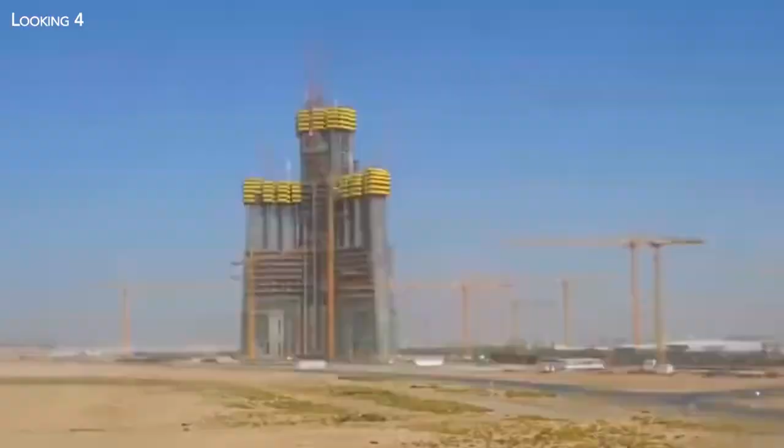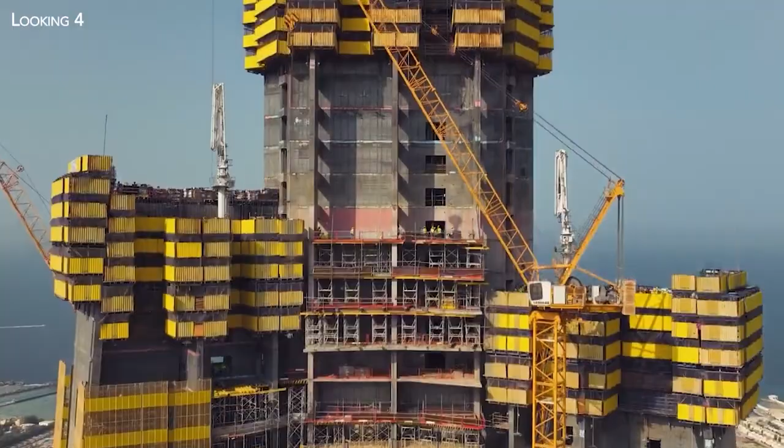For years, this tower was considered dead. An abandoned megaproject, hundreds of millions of dollars frozen in the desert. And yet, against all expectations, something happened. The Jeddah Tower, or the Kingdom Tower, it is designed to be the first building that is 1 kilometre.

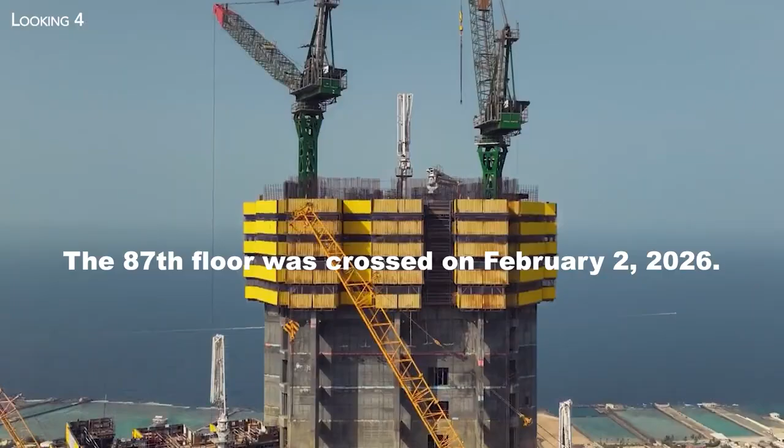In late December 2025, the Jeddah Tower quietly crossed a critical threshold, 80 floors completed. But what really shocked the construction world wasn't the number of floors, it was the pace. Today, a new floor rises every 3 days. If this pace holds, it could hit 1 kilometre by 2028, becoming the tallest structure ever built by humans.

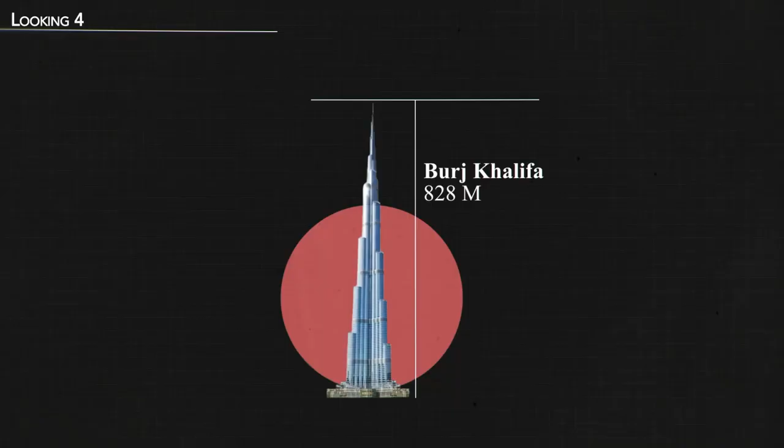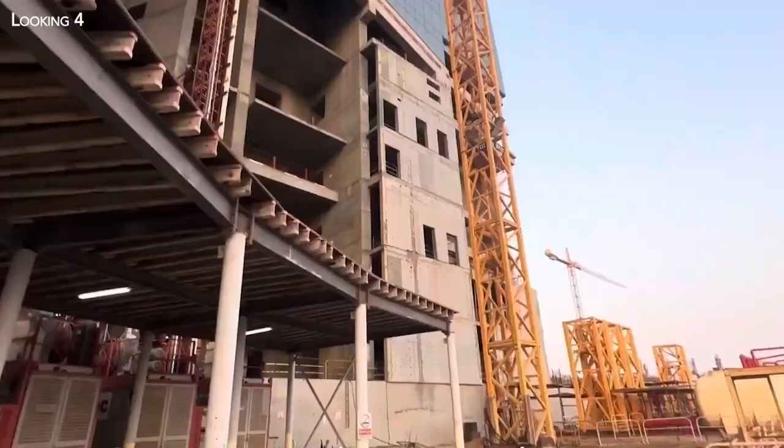So the real question is simple. Is this the greatest construction comeback ever, or the setup for another collapse? Today, we're going to break down exactly how this project came back from the brink of collapse, what engineering challenges have already been solved, and what could still derail one of the most ambitious construction projects in history. Because after a 7-year shutdown, restarting a megastructure of this scale is something that has never been done before.

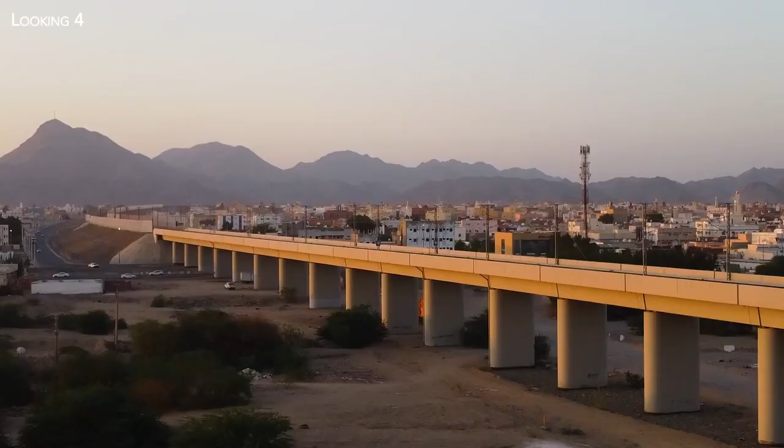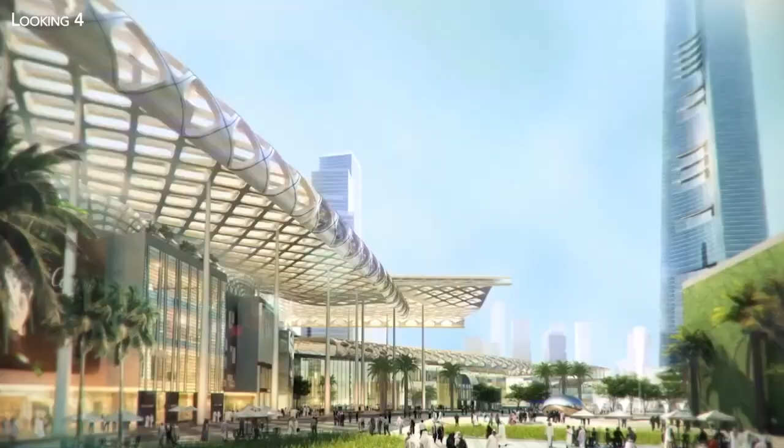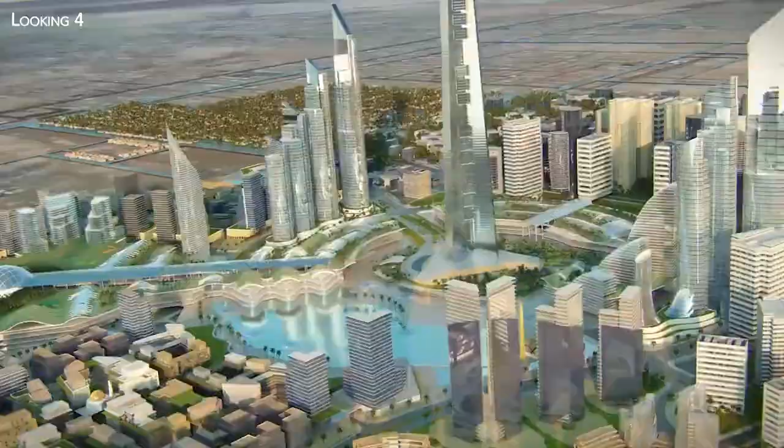The Jeddah Tower isn't just a tall building in the desert. It's supposed to be the centerpiece of something much bigger. A $20 billion project called Jeddah Economic City, stretching along the Red Sea coast, filled with business districts, luxury residences, and tourist attractions. The entire development is planned to cover 5.2 million square meters. The goal? Create a brand new urban hub, attracting international investors, diversifying the local economy, and eventually easing congestion in Jeddah's packed city center.

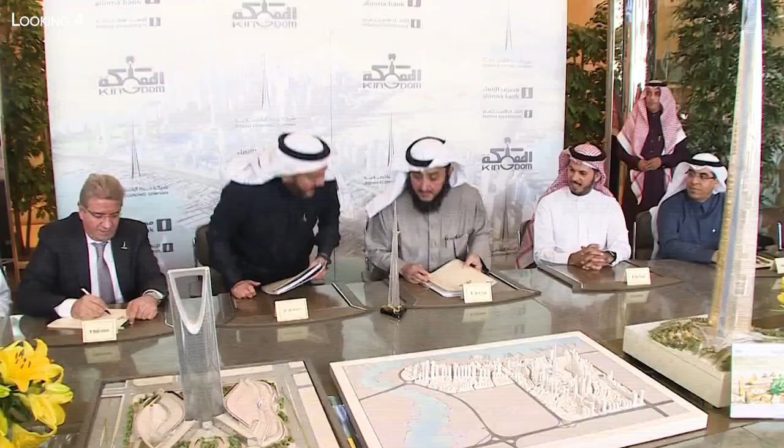The idea of the Jeddah Tower was first mentioned in 2008, at a time when Saudi Arabia wanted a world-class architectural icon. It wasn't just about height. From the very beginning, the ambition was huge. This building had to symbolize Saudi Arabia's economic, technological, and cultural ambitions for decades to come.

And the choice of Jeddah wasn't random. Located on the Red Sea coast, it's both the gateway to Mecca and a major port connecting Africa, Asia, and Europe. Building the tallest tower on Earth here sends a very clear message. Saudi Arabia is serious about being a global player in innovation, luxury tourism, and global trade.

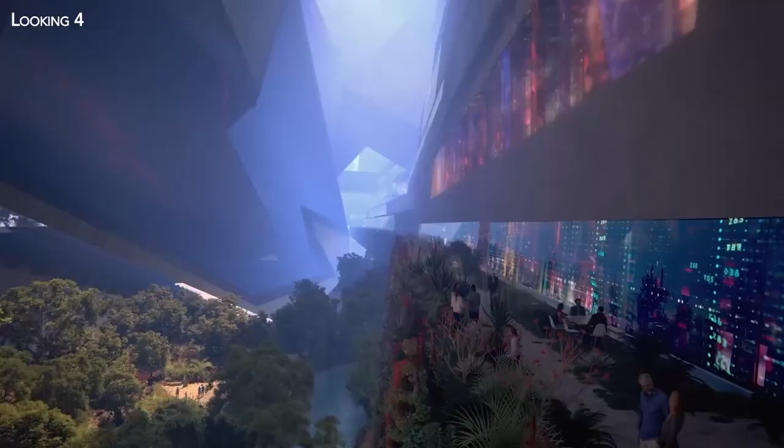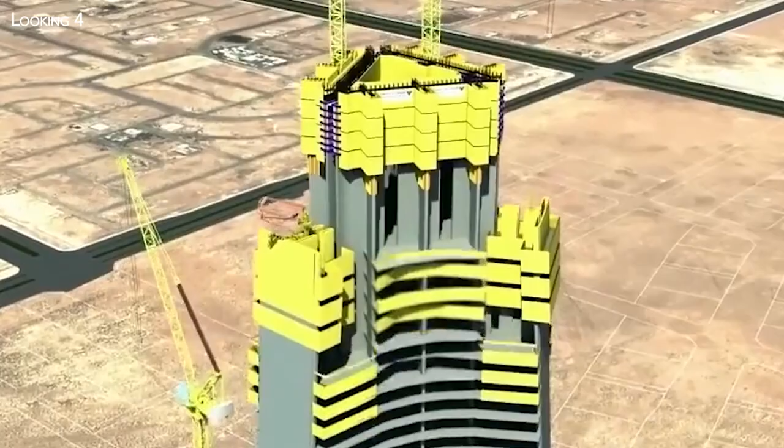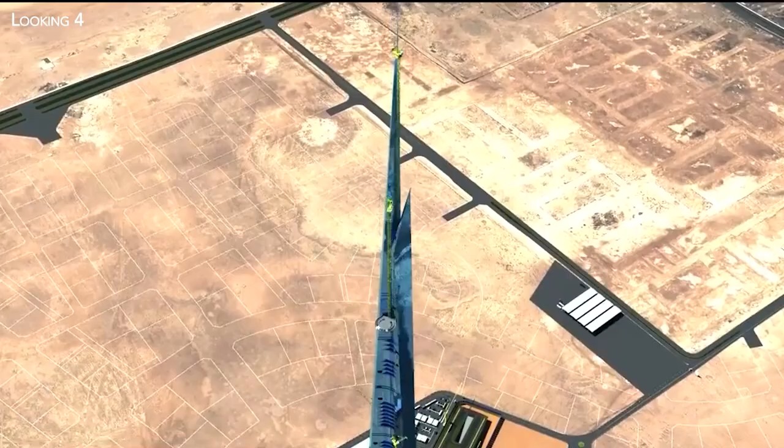But even with vision, ambition, and money, turning this dream into reality would require solving engineering challenges never attempted at this scale before. And right from the start, the tower was designed to break records. Not just in height, but in engineering. The architects? Adrian Smith and Gordon Gill, the Chicago-based firm behind the Burj Khalifa. From 2010, they designed a tower to reach at least 1,007 meters. But breaking the 1 kilometer barrier isn't just an architectural milestone. It's an engineering problem no one has ever fully solved before.

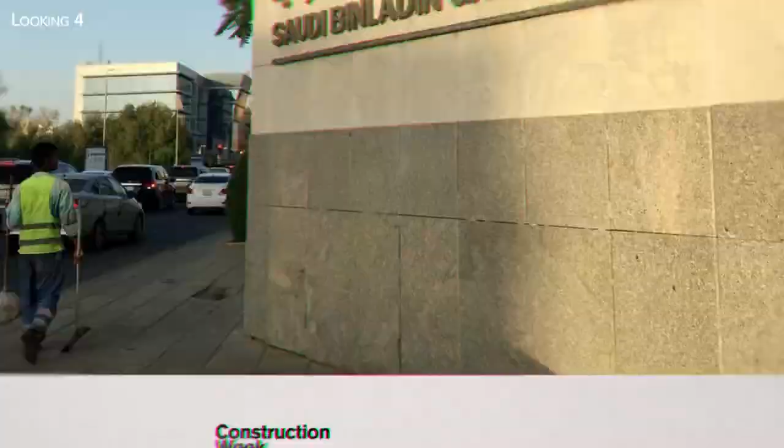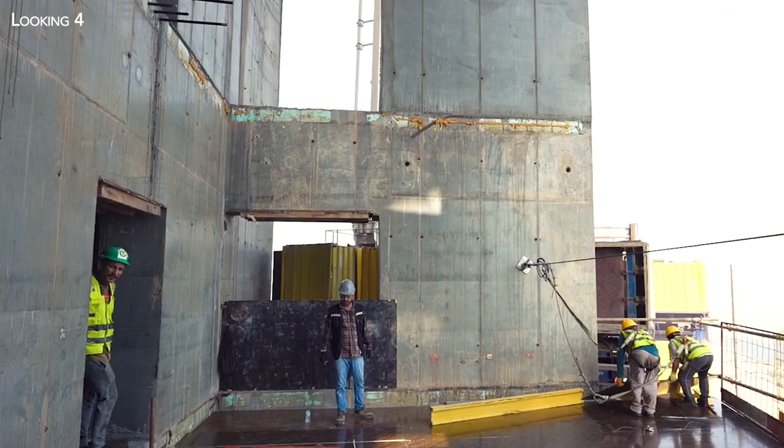When the Saudi Binladin Group officially returned to the site in January 2025 under a contract worth $2 billion, they knew exactly what they were facing. Restarting a project after 7 years of inactivity is hard enough. Doing it at this scale, that's a nightmare waiting to happen. The first challenge? Concrete. Not just any concrete. The kind that can support a 1 kilometer tower. Every cubic meter has to withstand forces that would crush ordinary buildings.

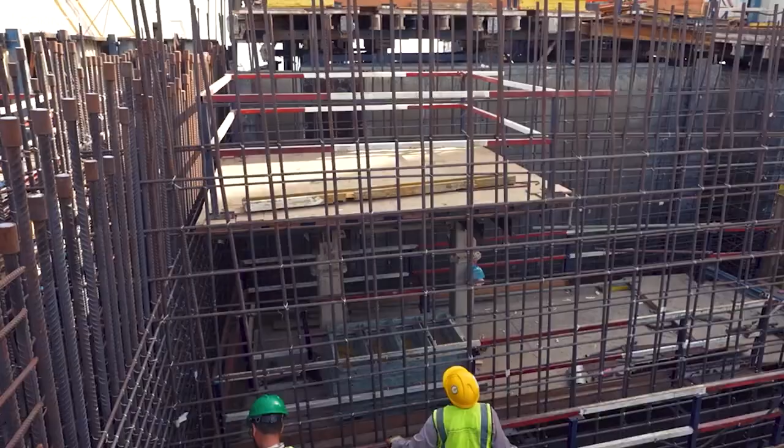During the ceremony marking the restart of construction, the group stated that the project now relies on cutting-edge technologies capable of producing high-performance concrete at levels never achieved before. According to Thornton Tomasetti, the structural engineering firm in charge, over 50% of the concrete work is already done. That's 250,000 cubic meters of concrete poured, enough to push the tower past 300 meters.

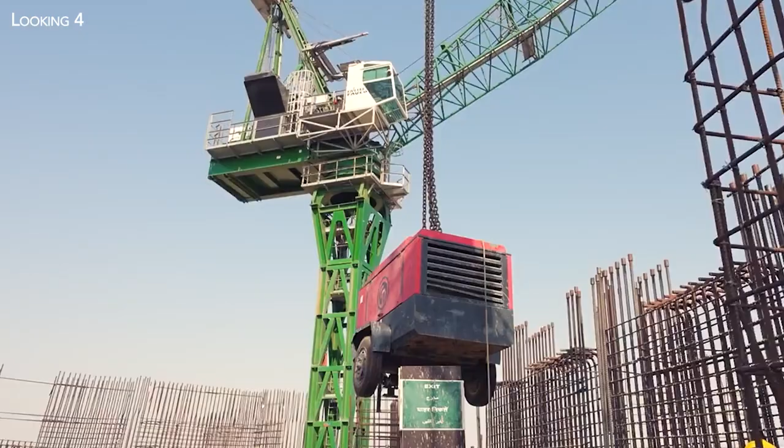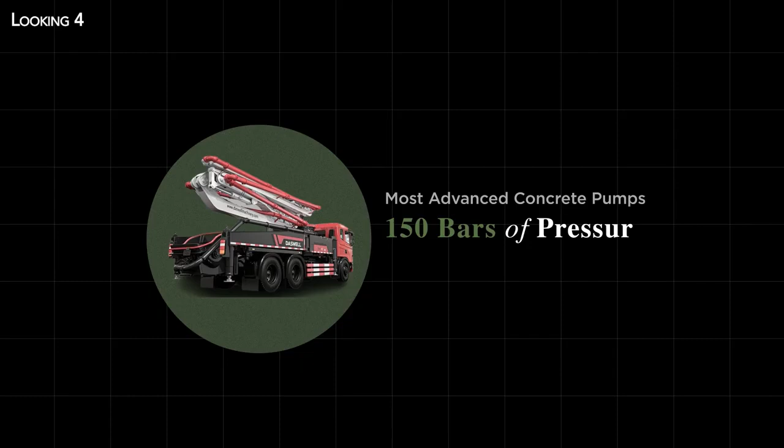But here's where things get tricky. Getting concrete higher than 500 meters isn't just difficult, it's a logistics puzzle that could kill the schedule. The most advanced concrete pumps in the world work at around 150 bars of pressure, pushing concrete up to 500 meters under ideal conditions. There's a world record, 621 meters, set in 2015. But beyond that, transporting concrete becomes far more complex and much slower.

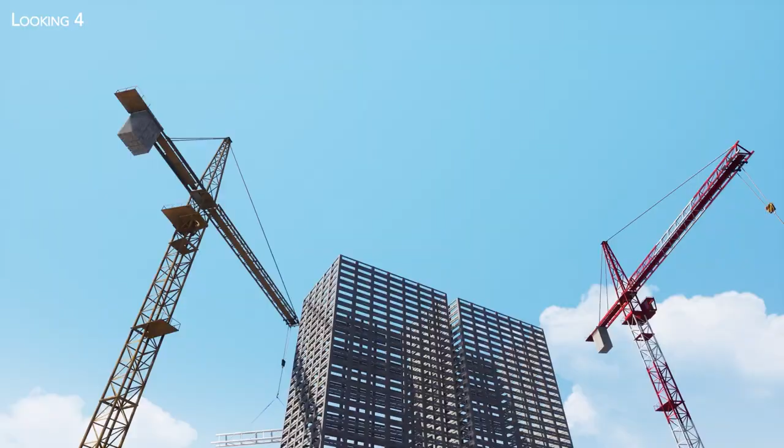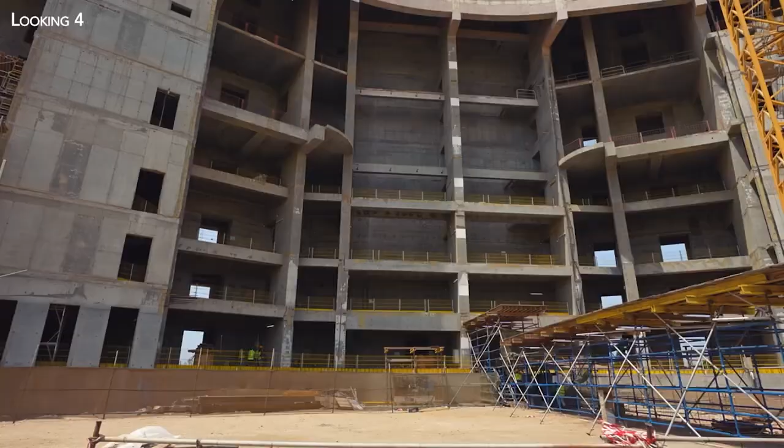At that point, engineers have to use cranes and suspended buckets, a method way slower and more complicated. Every extra floor risks delays, costs, and safety hazards. At this scale, even small delays translate into tens of millions of dollars. That's why, for the top of the Jeddah Tower, a radical decision was made: steel instead of concrete. Switching to steel for the upper levels bypasses the pumping problem entirely and speeds up construction at extreme heights. It's the same trick used on most skyscrapers over 600 meters. Even the Burj Khalifa employed this strategy.

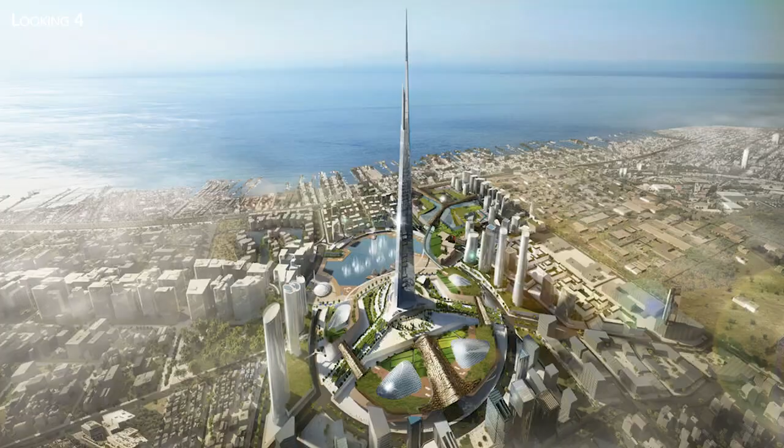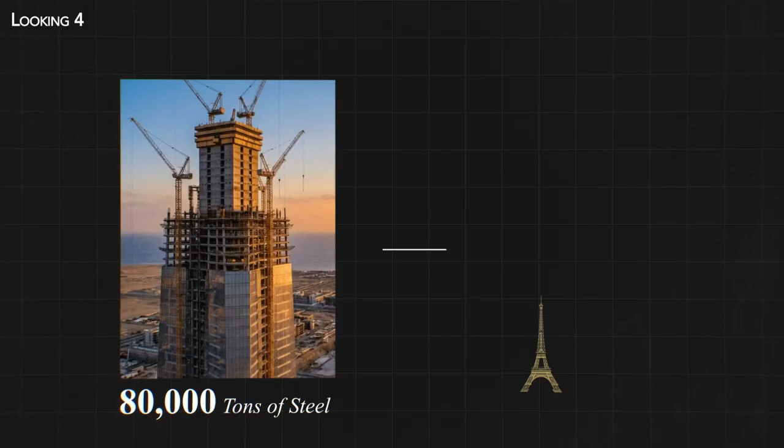Just like the Burj Khalifa, the top of the Jeddah Tower won't even be occupied. This section, called the spire, stretches about 350 meters into the sky, mostly housing technical equipment. It's also designed to be spectacular, a symbol, a statement, crossing the 1 kilometer mark, and claiming the crown as the tallest building on Earth. To achieve this, the project needs around 80,000 tons of steel. Think about it. That's like stacking 10 Eiffel Towers on top of each other. And the pace, mind-blowing. The construction team adds a new floor every 3 to 4 days. That's fast, really fast.

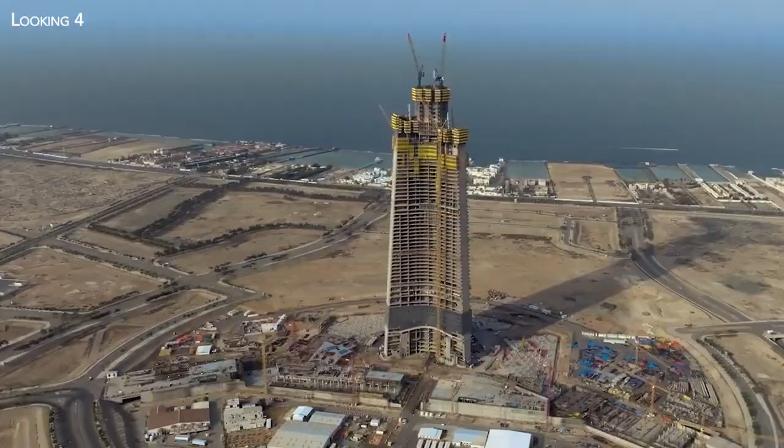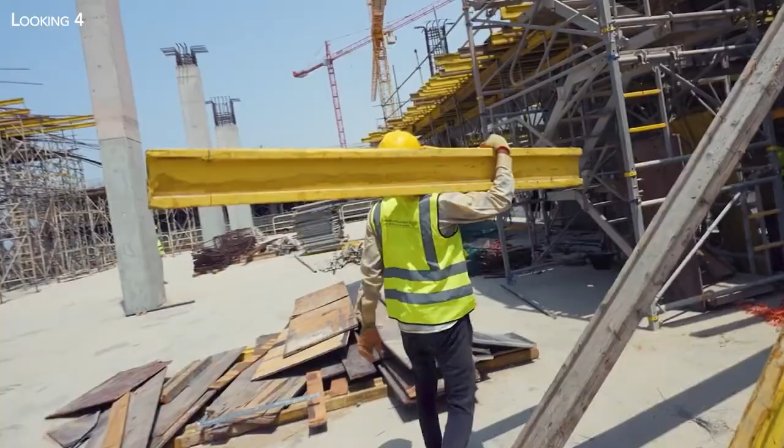According to Thornton Tomasetti's update on January 6, 2026, if this rhythm continues, the 100th floor will be complete by February. Every test so far, from wind tunnel simulations to stress tests on the structural core, shows the tower performing exactly as expected. In this update, the American firm notes that the project made significant progress in 2025, and that the team is now combining cutting-edge technical innovations with advanced computer modeling to ensure the tower can withstand wind forces at 1,000 meters above ground.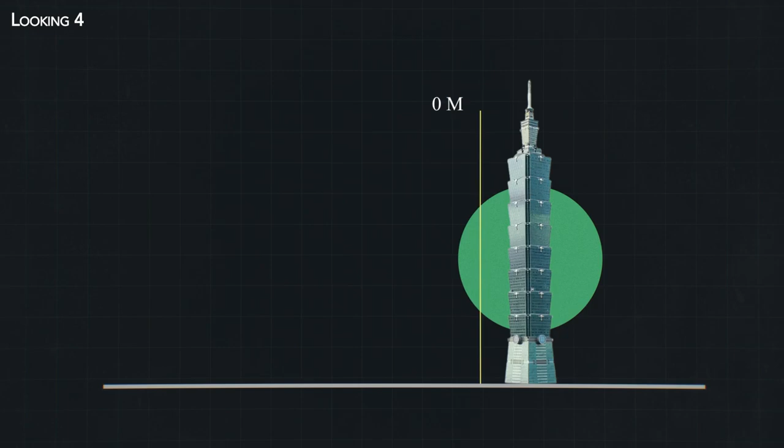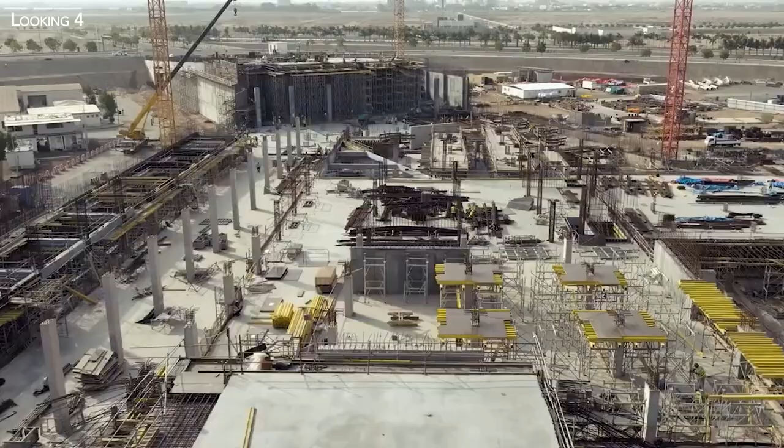At these heights, wind isn't just a factor. It becomes a force of nature, powerful enough to push a building sideways by meters. To put things into perspective, a 500-meter skyscraper must resist wind forces up to 60 times greater than a conventional 60-meter building. Now imagine doubling that height. At the scale of the Jeddah Tower, engineering constraints enter completely uncharted territory.

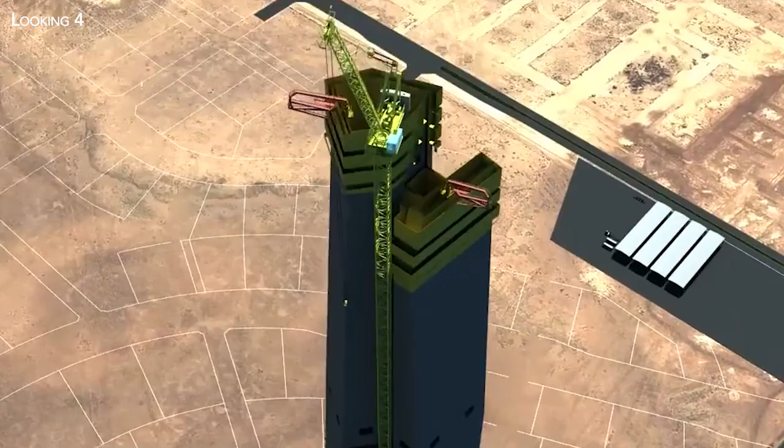Simulations show that during strong winds, the very top of the tower could sway as much as 2 meters, while the highest occupied floors may experience movements of up to 1.2 meters. Those numbers sound extreme, almost unsettling. But for a structure of this size, they're not only acceptable, they're expected. These movements aren't signs of weakness, they're signs of control. The tower isn't fighting the wind, it's absorbing its energy, bending just enough to prevent damage.

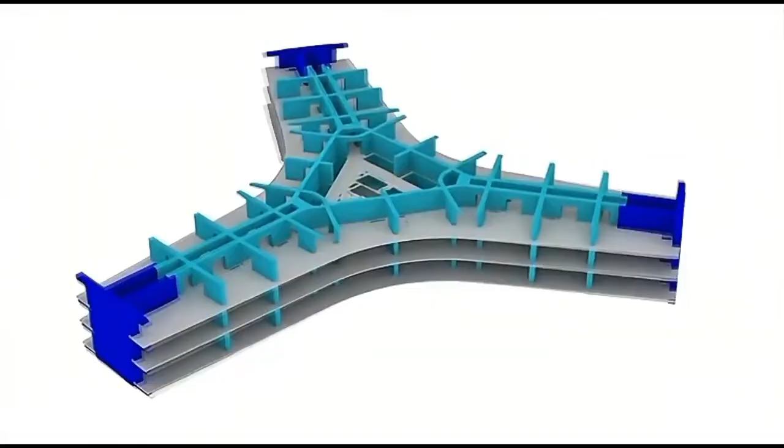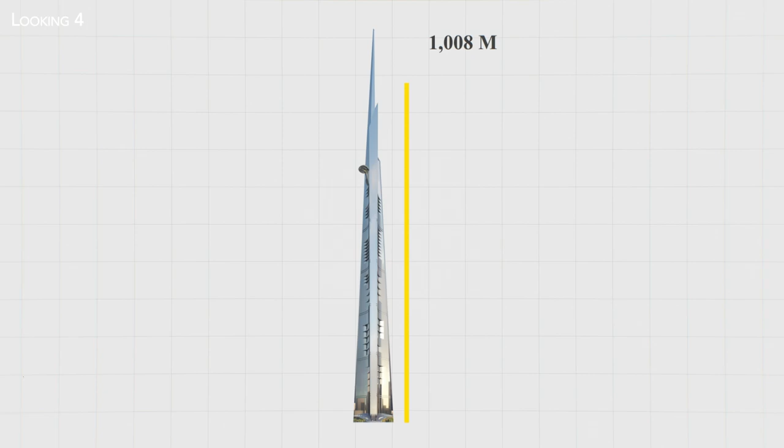And the key to that control starts with the shape itself. The Jeddah Tower's ground footprint, often described as a 3-petal form, was never about aesthetics. It's an aerodynamic solution engineered to disrupt wind vortices before they can build up and amplify the sway. As skyscrapers grow taller and heavier, they face 2 relentless enemies: their own colossal weight and the horizontal forces of the wind. At 1,000 meters tall and weighing an estimated 900,000 tons, the Jeddah Tower demands a structure perfectly tuned to this extreme scale. But the stability of a giant like this doesn't begin in the sky.

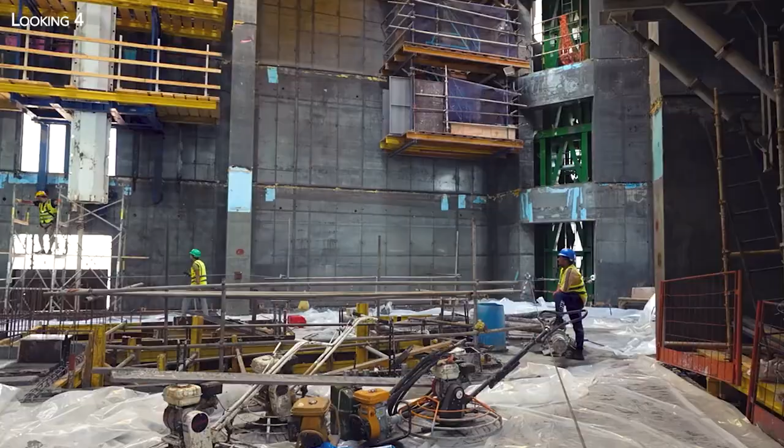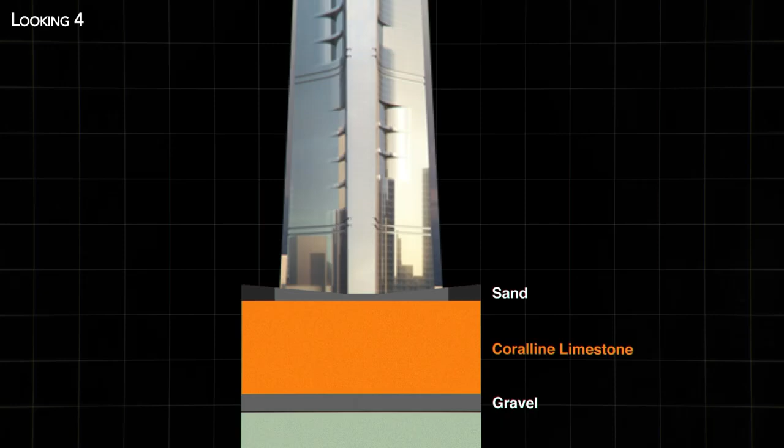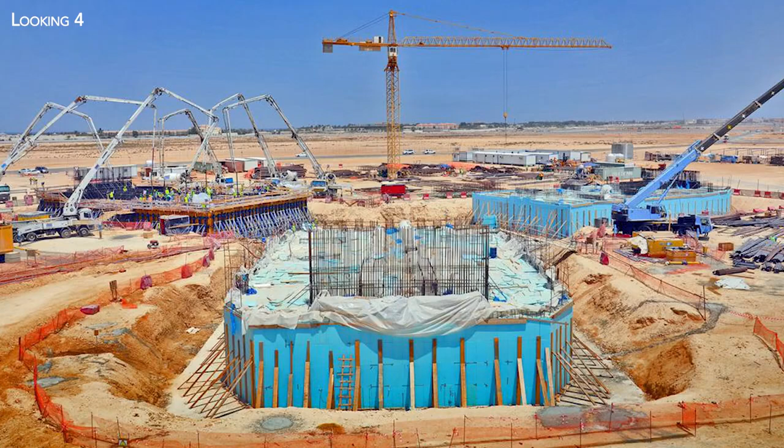It starts underground. Before the first floor ever rose above the desert, engineers had to solve a brutal problem. How do you anchor 900,000 tons of concrete and steel into soft, coastal soil? Because beneath the Jeddah Tower lies not bedrock, but layers of sand and limestone, materials that shift, compress, and crack under pressure. The solution was to go deeper. The tower rests on more than 270 massive piles, driven up to 110 meters into the ground in places, reaching stable geological layers far below the surface.

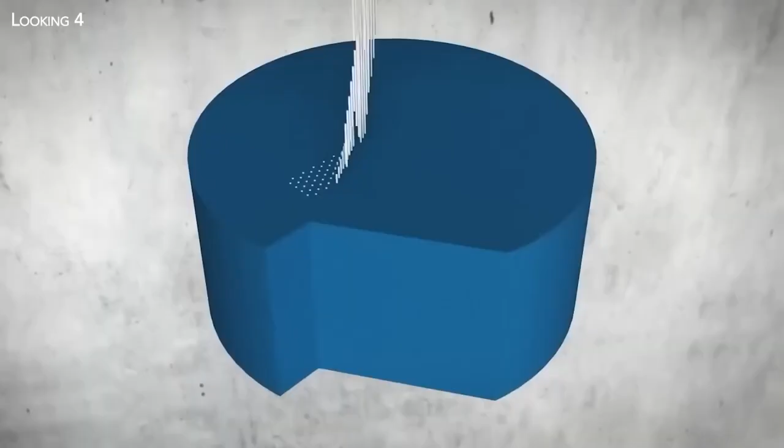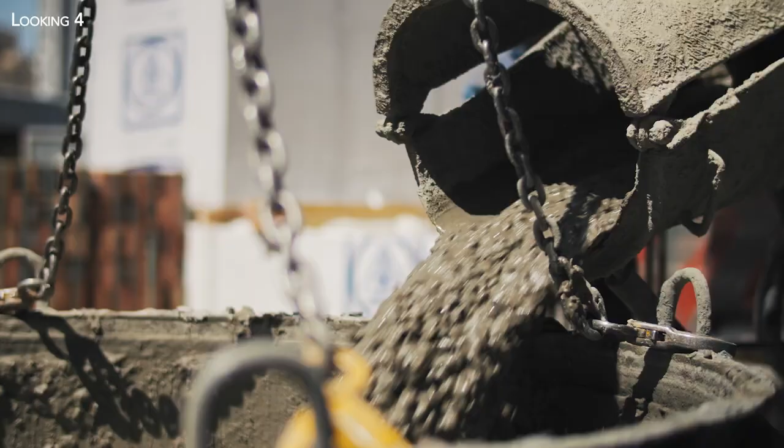It pushes foundation engineering to extreme limits. By comparison, the Burj Khalifa's foundations rely on piles approximately 50 meters deep. These piles are tied together by a gigantic reinforced concrete slab nearly 5 meters thick. On top of that, the Red Sea's proximity introduces another enemy: saltwater corrosion. To fight it, engineers used high-performance concrete mixes and specialized steel reinforcements, designed to withstand decades of salinity, humidity, and extreme temperatures.

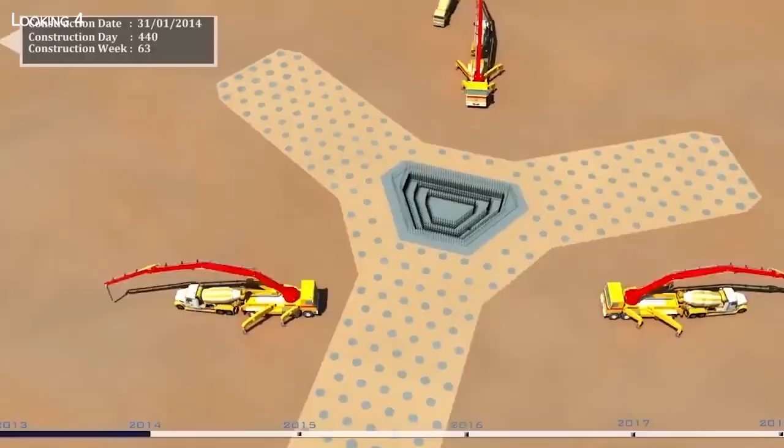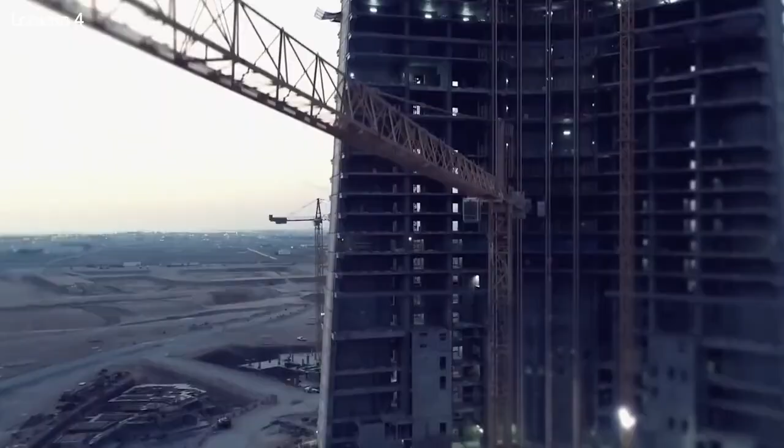Every stage of the foundation was monitored in real time. Continuous inspections and sensors embedded deep underground tracked how the soil moved and how the concrete behaved. At this level of complexity, there's no room for approximation, because the Jeddah Tower isn't designed for years, it's designed for decades. Restarting a construction site is hard. Restarting the tallest building ever attempted after 7 years of inactivity is something else entirely.

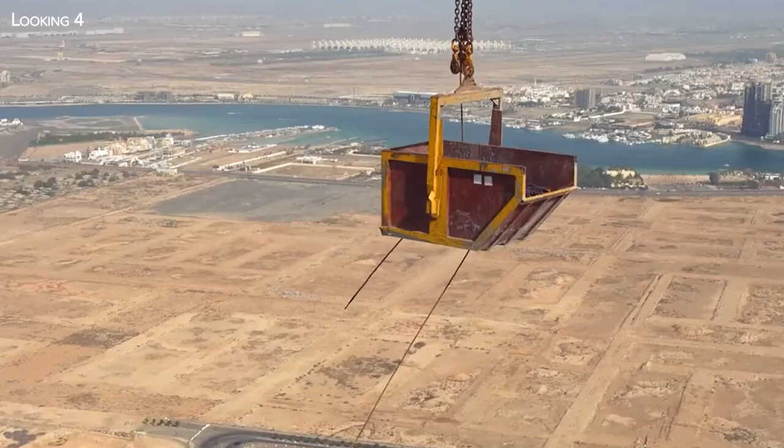When crews returned in early 2025, they weren't coming back to an empty site. They were returning to a tower already hundreds of meters tall, exposed for years to heat, humidity, strong winds, and the harsh coastal climate of the Red Sea. Before adding a single new floor, engineers had to answer one critical question: was everything still safe?

Media reports say the Saudi government is taking managerial control of the Saudi bin Laden Group, Saudi Arabia's biggest construction firm.

Construction had been halted in 2017, after the tower had already begun rising above ground. The pause was caused by financial difficulties, internal tensions with the Saudi bin Laden group, and a complex political context in Saudi Arabia.

Saudi Arabia, dozens of princes and government officials have been detained in a high-profile corruption crackdown.

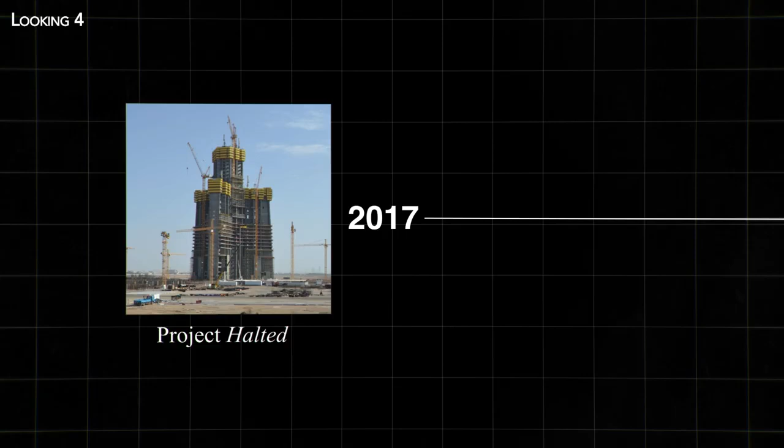The unfinished tower became a symbol of a project seen as too ambitious, or even impossible to complete. Many believed the Jeddah Tower would never be finished. But in late 2024, everything changed. The project was officially relaunched, with a new contractual framework, clearer financial backing, and strong political support to see it completed. When teams returned in January 2025, the challenge was enormous.

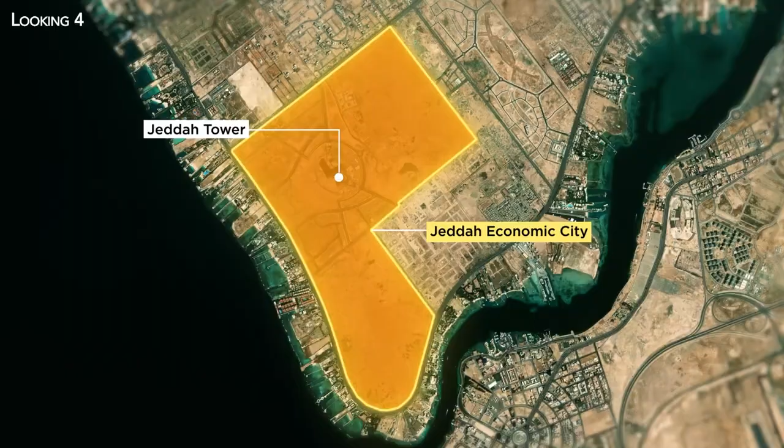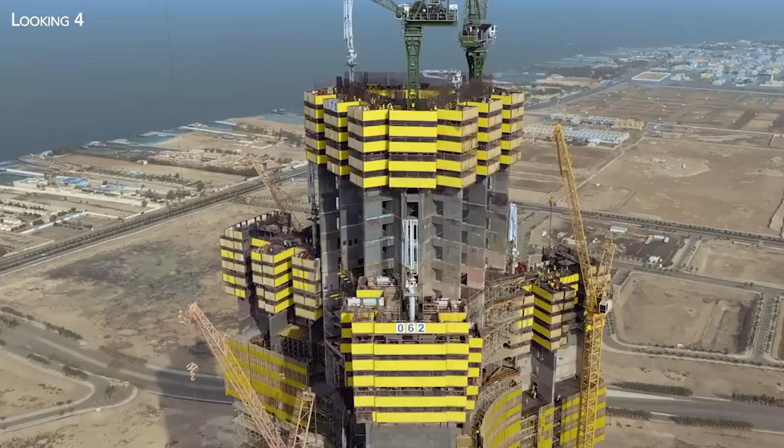The site had to be reactivated, existing structures inspected, technical standards updated, logistics rebuilt. Extensive audits were carried out to ensure the concrete, steel reinforcement, and foundations had not deteriorated after years of exposure to time and climate. Only then could large-scale construction safely resume. Once it did, the ramp-up was rapid.

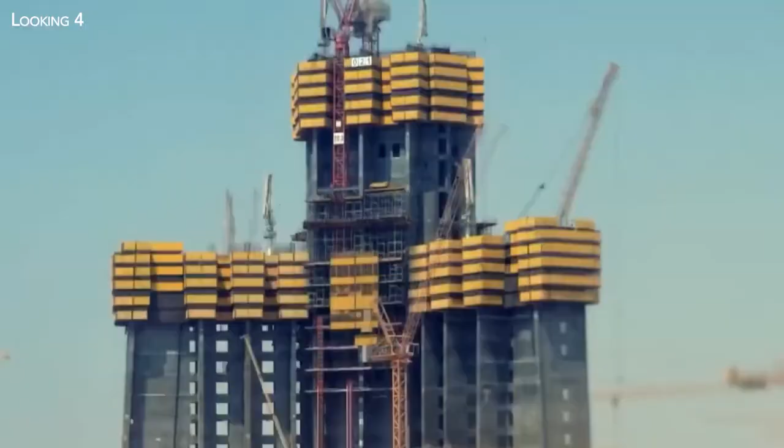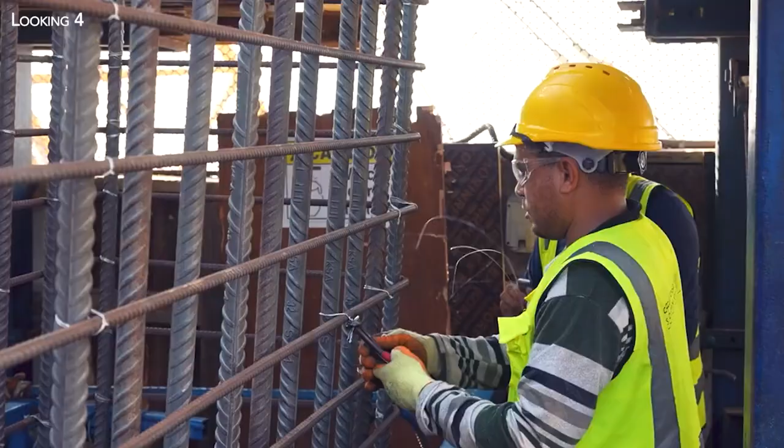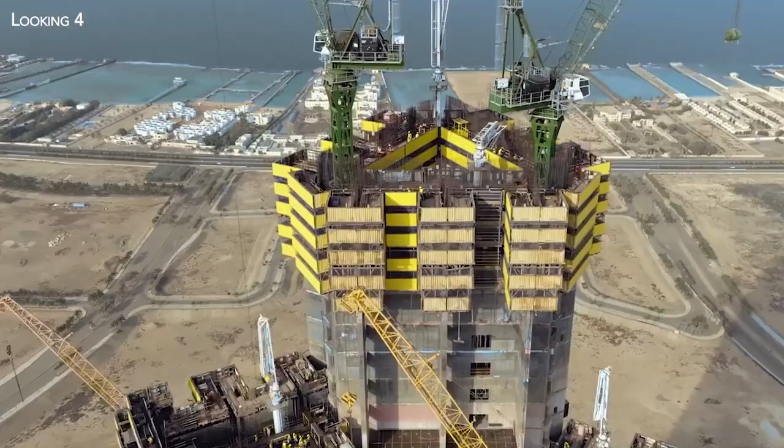Today, the Jeddah Tower is once again a credible and closely watched project, a site that nearly vanished, now moving forward at full speed. Once construction was fully back on track, a new challenge took over: coordination. Because building the tallest tower in the world isn't just an engineering problem, it's a logistics problem. And logistics at this scale directly mean cost control, deadlines, and political credibility. Every day, thousands of decisions have to be made in the right order, at the right time, by the right teams.

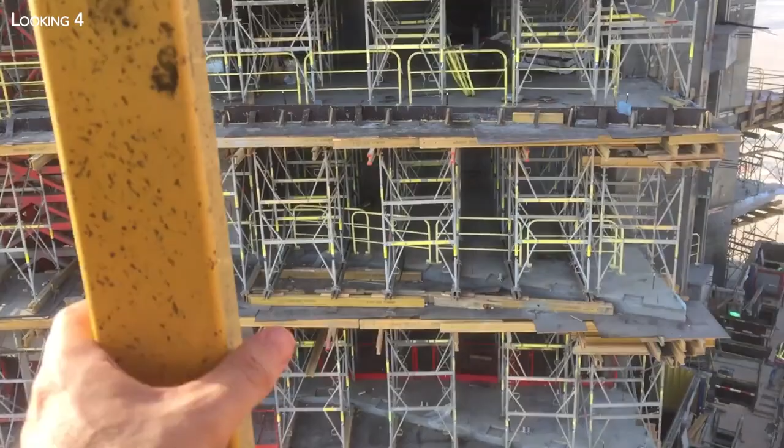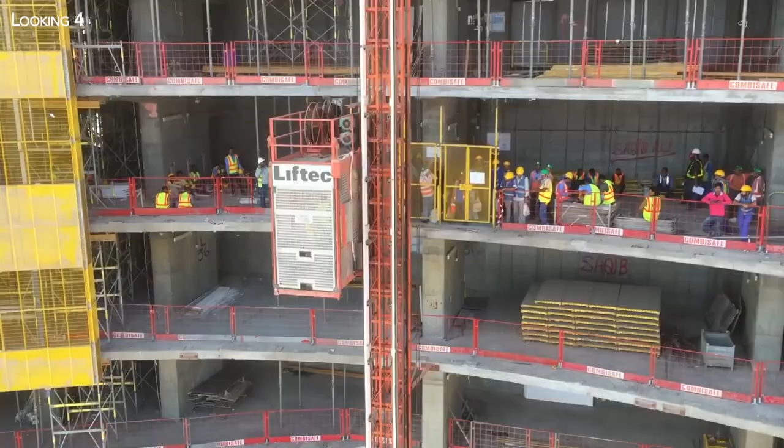Since March 2025, overall project management has been handled by Turner Construction. The company, known for its work on major international megaprojects, has described the Jeddah Tower site as one of the most complex construction environments in the world. It requires precise coordination between the tower's construction and the surrounding infrastructure of Jeddah Economic City. A single coordination failure can cause delays, cost overruns, or even safety risks for workers on site.

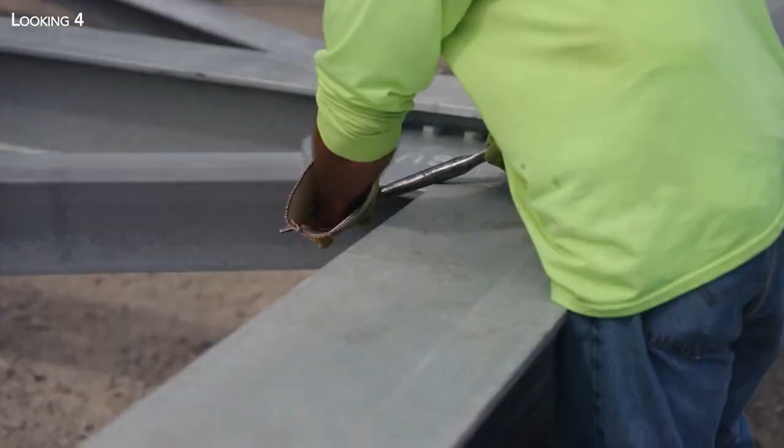And there's another pressure point: speed. With a new floor added every 3 to 4 days, every trade must operate in a precisely controlled sequence, without ever slowing the overall pace. There is no room for bottlenecks. To manage this, the site relies on advanced digital planning tools, combining 3D modeling, logistics simulations, and real-time monitoring of operations. The goal is simple: identify problems before they appear on site. At this scale, success doesn't depend on a single breakthrough. It depends on perfect coordination, day after day, floor after floor.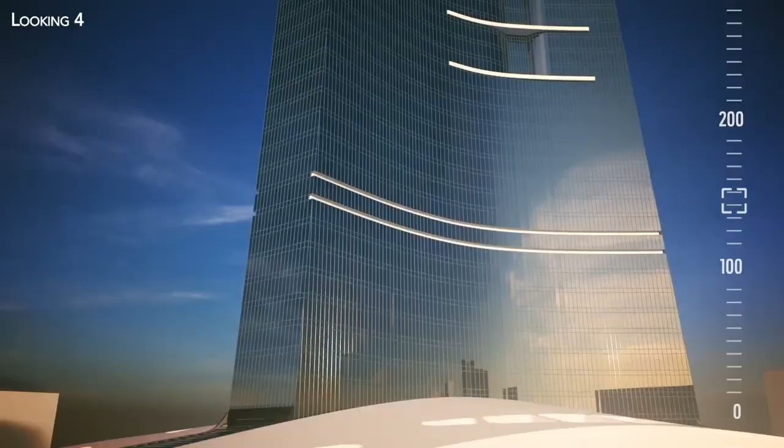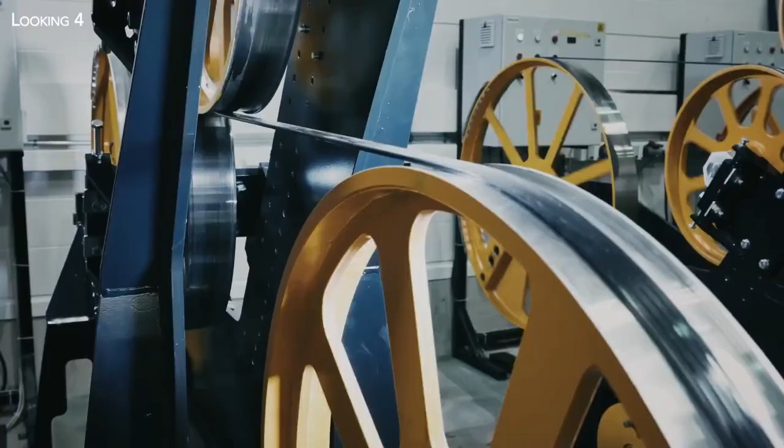At 1 kilometer above the ground, stairs are not an option. Without elevators, the Jeddah Tower would be impossible to live in. And designing elevators for a building this tall may be one of the hardest engineering problems of the entire project. Because moving people vertically over 168 floors isn't just about speed, it's about safety, comfort, reliability. To solve this challenge, the project turns to Kone, the Finnish elevator specialist. In total, 59 elevators will be installed inside the tower, including 7 double-deck elevators capable of carrying 2 groups of passengers at the same time.

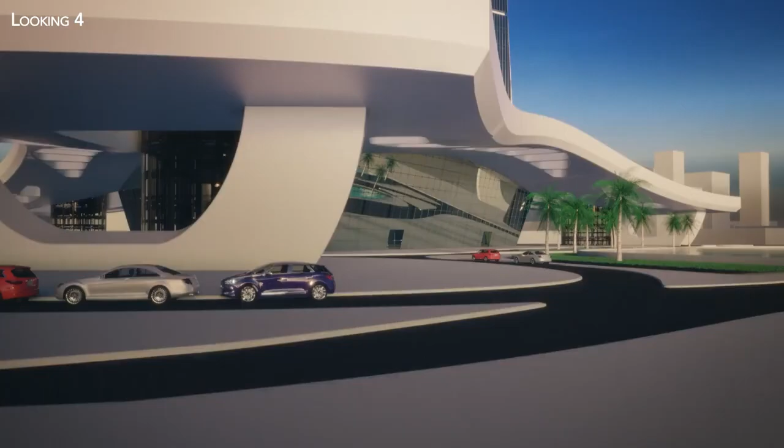But the system doesn't work like a typical skyscraper. No elevator runs directly from the ground floor to the top. Instead, the tower is organized around 3 major transfer lobbies. Passengers first take an express elevator to one of these sky lobbies, then switch to another elevator, serving a different zone of the building. This approach avoids the need for extremely long cables. Throughout the tower, technical floors and refuge areas are integrated for fire safety and emergencies.

For Kone, the Jeddah Tower is the ultimate test of its UltraRope technology. Unlike traditional steel cables, UltraRope is made from carbon fiber. It's lighter, stronger, and far more durable. This reduces the weight of the elevator system, improves energy efficiency, and increases service life. Thanks to this technology, each elevator can carry up to 26 people, or about 2 tons per trip, double that in the double-deck models. In terms of speed, the elevators will exceed 10 meters per second, or more than 36 kilometers per hour. Fast, but intentionally controlled.

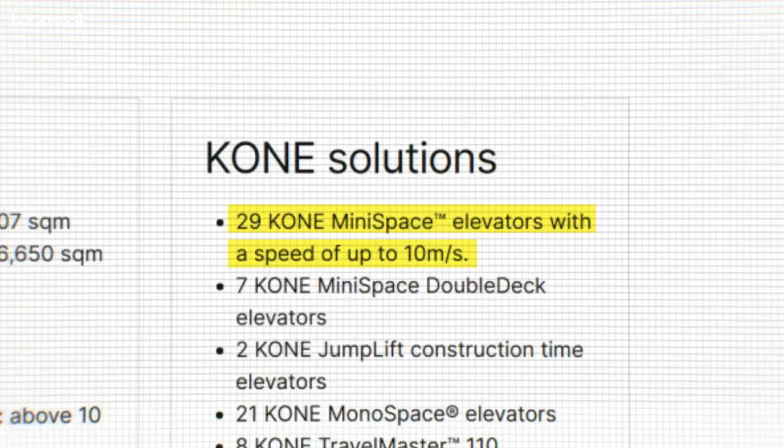While some towers, like the Shanghai Tower, reach speeds close to 20 meters per second, Kone chose a different balance. Higher speeds can reduce comfort, especially over long vertical journeys. According to Kone, around 36 kilometers per hour is the optimal speed to minimize discomfort from acceleration and deceleration. Without this advanced elevator system, the Jeddah Tower wouldn't be a skyscraper. It wouldn't even be usable. It would simply be the tallest empty structure ever built.

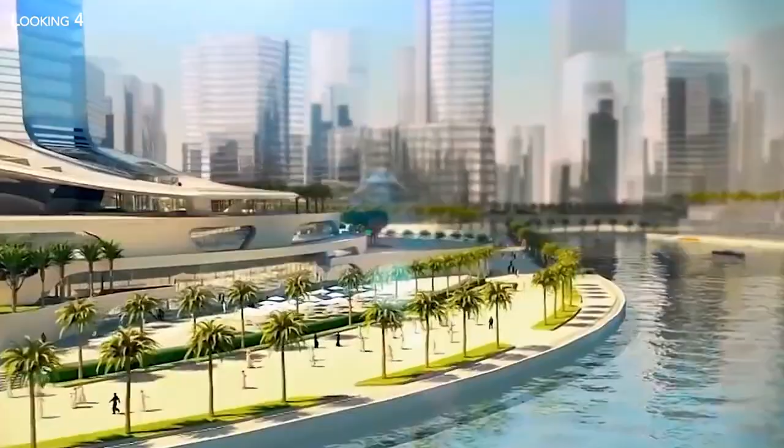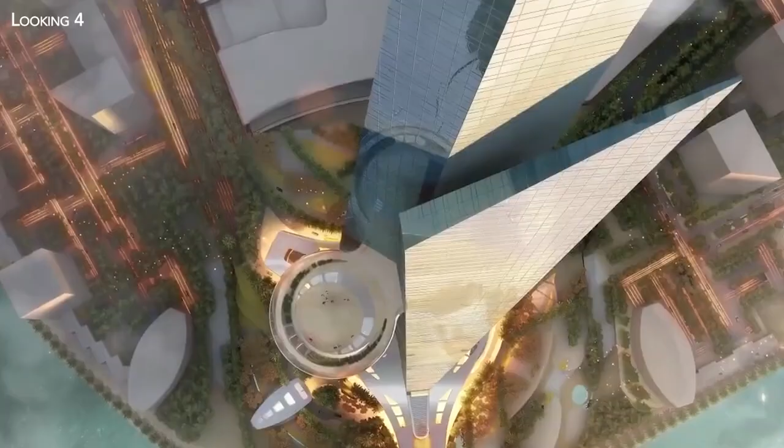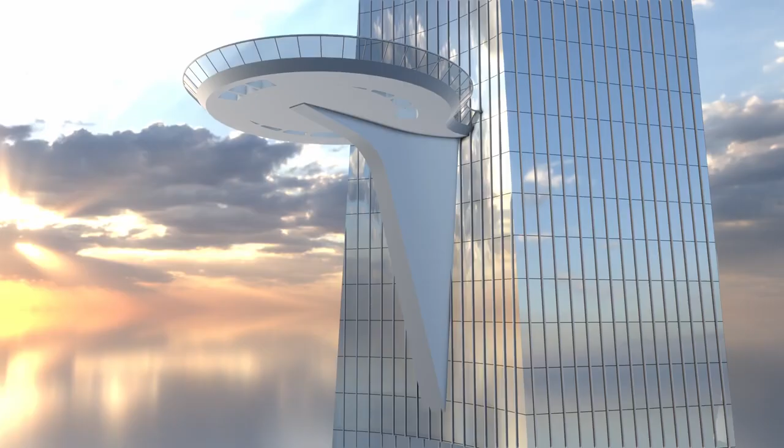Once completed, the Jeddah Tower will function as a vertical city. The tower will house office spaces, more than 400 apartments and luxury residences, as well as a 5-star hotel with nearly 200 rooms. The tower will also include fine dining restaurants, a spa, fitness centers, swimming pools, and a wide range of amenities designed to make the building fully livable. But the most spectacular feature sits far above everything else. At 630 meters above the ground, the Jeddah Tower will feature a cantilevered observation deck. Once completed, it will become the highest observation deck in the world. From this platform, visitors will be able to see the Red Sea, the desert, and the entire city of Jeddah, stretching to the horizon. Not for those prone to vertigo.

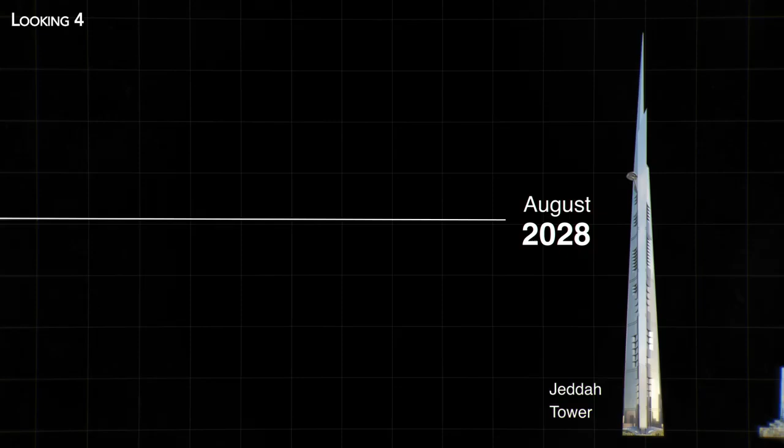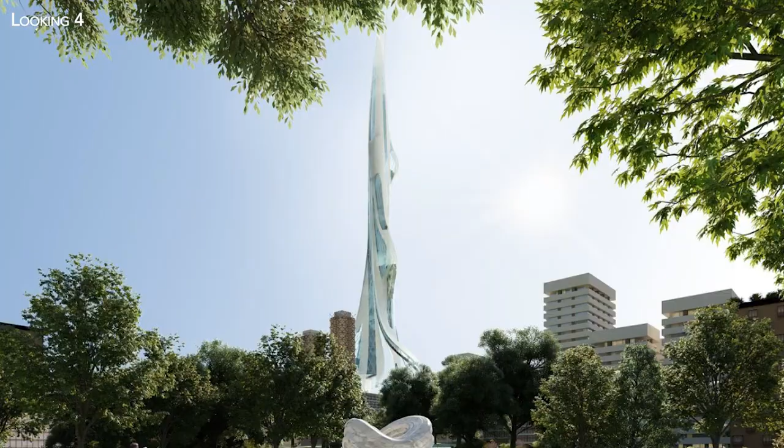If the current schedule holds, the Jeddah Tower is expected to be completed by August 2028. Standing at least 173 meters taller than the Burj Khalifa, it would become the tallest structure ever built. But it won't just be a record. The tower will also be a physical symbol of Saudi Arabia's Vision 2030 and its ambition to reshape its future beyond oil. But this won't end the race to the sky. Even taller projects are already being discussed. One of them is the proposed Rise Tower in Riyadh, a skyscraper estimated at $5.3 billion, designed to reach an almost unimaginable height of 2 kilometers.

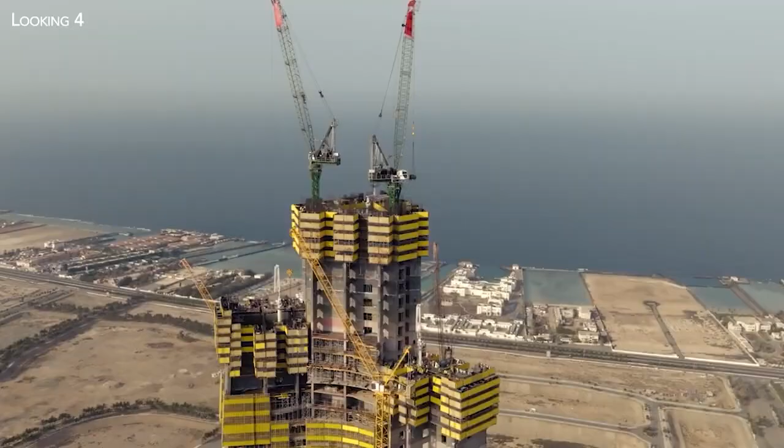For now, though, all eyes remain on Jeddah, because right now, along the Red Sea coast, one of the most expensive and ambitious construction bets in modern history is being built, one floor every 3 days. The tower is climbing fast, but will this pace hold? Will August 2028 really be the finish line? If there are no more interruptions, and that's a big if, it's entirely possible. And I'll be following this project very closely.